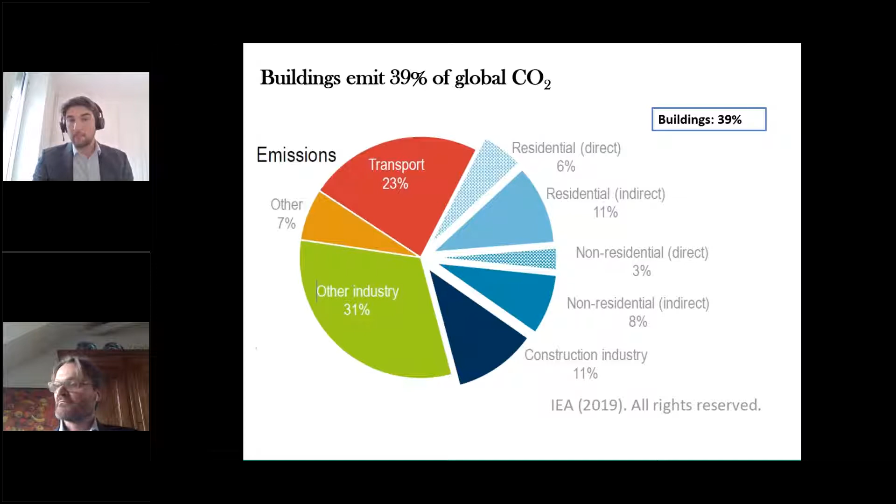Going a little bit further into new construction, you can see that globally, about half of the buildings that we're going to have by 2060 have not been built yet. This is equivalent to a whole New York City built again every month for the next 40 years. That firstly shows a challenge of a whole lot of new emissions we can expect to come in through construction and operation, but also it is an opportunity to build a green New York City every month.

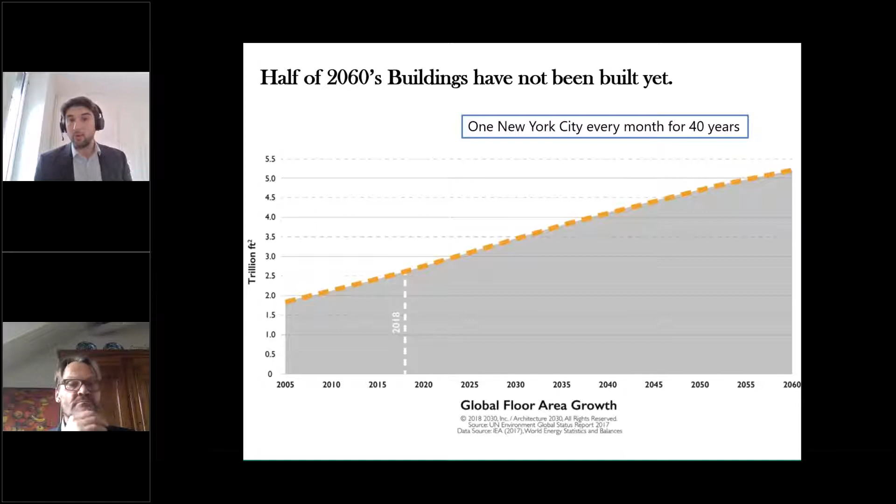And when we look at the data a little bit further, you can see that this opportunity is particularly big across Africa and Asia.

Whilst in Europe and North America, most of the buildings that we'll have by 2060 have already been built, and there the biggest challenge will be about greening our existing building stock. Across Africa and Asia, there will be a huge boom of construction over the next several decades.

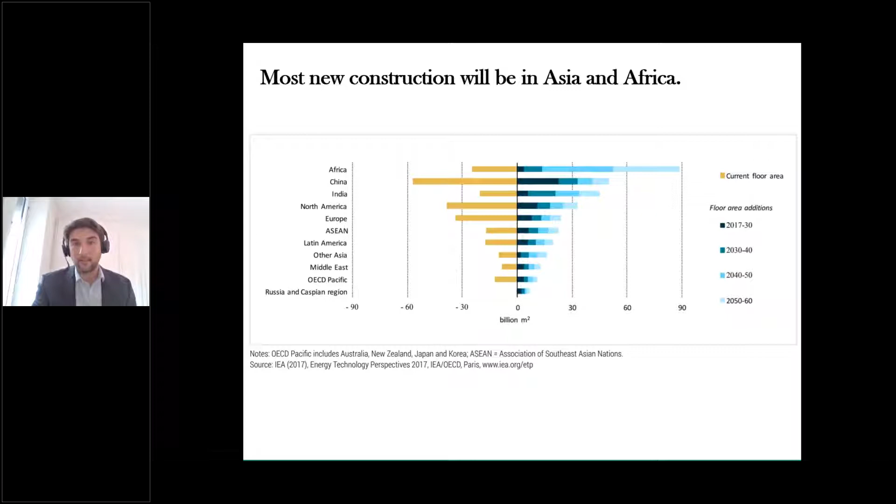And this is also where AKDN is very active. So we have a big opportunity to make these buildings green and to embed green performance and principles there from the outset. New construction provides a great opportunity for climate action, especially across AKDN geographies.

To achieve this, green design is key. We can retrofit green performance, and this is possible. However, when we do this from the outset of the building design, planning, and construction, it is more powerful. We achieve better green performance, and we do this a lot more economically. So we achieve more with less.

So how does AKDN approach this? Last year, AKDN introduced a set of green building guidelines covering all our new construction projects and all existing buildings. These guidelines are applied across all new projects. They cover a set of themes, which are materials, greenhouse gas emissions, energy use, water use, and importantly, adaptation.

Across our built environment work, we are ensuring that climate change mitigation and adaptation go hand in hand. So not only are our buildings green in the sense that they emit less and contribute less towards global climate change, but also we are striving to make them resilient and adaptable to the challenges that climate change is bringing, and they provide a comfortable environment even in the new climate.

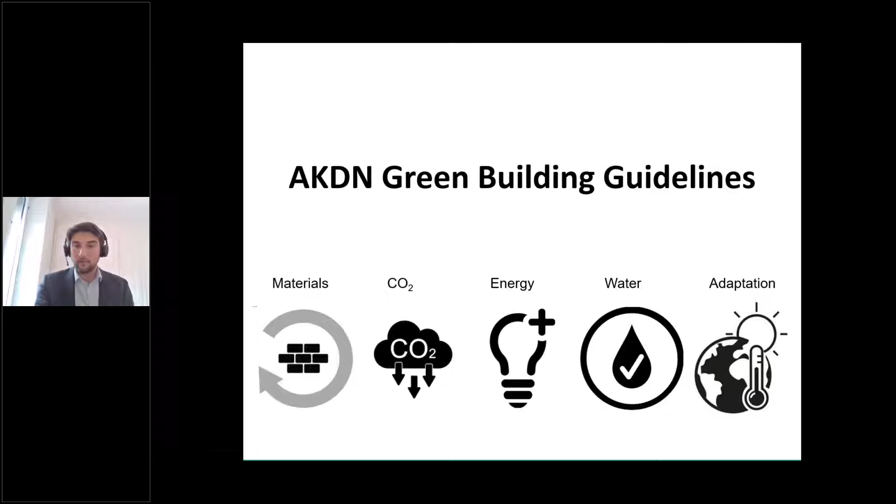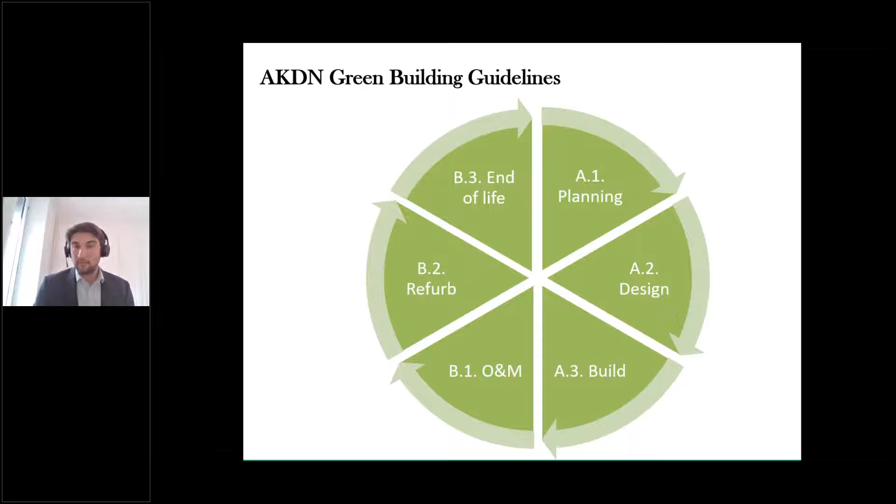The green guidelines take a life cycle approach, so they address all life cycle stages of a building, starting from planning, deciding that we want a new building, through to design, construction, all the way through operation and maintenance, and through to the end of life and decommissioning. Today, we will focus on new construction.

So the overall philosophy for new construction may be counterintuitive: when we're building, the greenest way to build is not to build. This certainly doesn't mean do nothing. Build nothing is all about going back to the principles of our objectives. What are we trying to achieve through construction?

Is it providing affordable healthcare to communities? Is it providing widespread education or safe habitat that enables communities to thrive? Whatever our objective is, we are now, as a standard part of the feasibility discussions of a project, going back to the original root objective of what we're trying to achieve and seeing, can we achieve this without building?

Can we use what we already have, repurpose an existing facility and refurbish it? So that we can achieve our objectives in a greener way? Can we leverage the use of technology to achieve our objectives?

All of these are not only powerful carbon reduction and green approaches, but also very much cost effective. So they directly relate to large cost savings. So they're very interesting, and we are starting to consider them seriously across all our new projects.

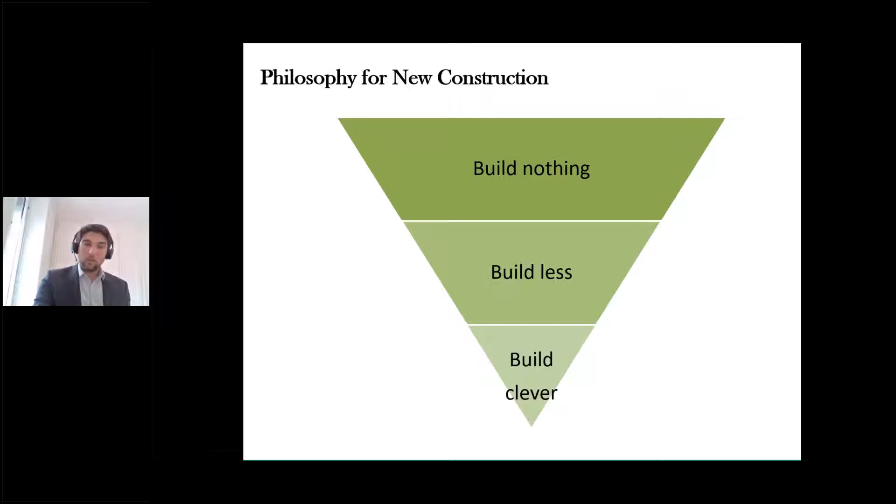So taking this on building clever, we'll start with what our buildings are made of, so materials. And this picture is one of our projects in northern Pakistan, and this is relatively representative of a large part of construction in the region, and it is with reinforced concrete.

So a lot of our construction currently is still with reinforced concrete or with steel structures, and considering the large volume of construction that we're expecting in our geographies, concrete is likely to play an important part of this journey. We are happy to see that we are already...

having low carbon alternatives to traditional concrete penetrate the market across, for example, East Africa, across Pakistan and India. And we're seeing some solutions offering up to 30% less CO2 for concrete compared to concrete using ordinary Portland cement, whether this is through cement replacement or through other adjustments of the formula of cement. So this is really important, and we're already exploring how to use this on our projects.

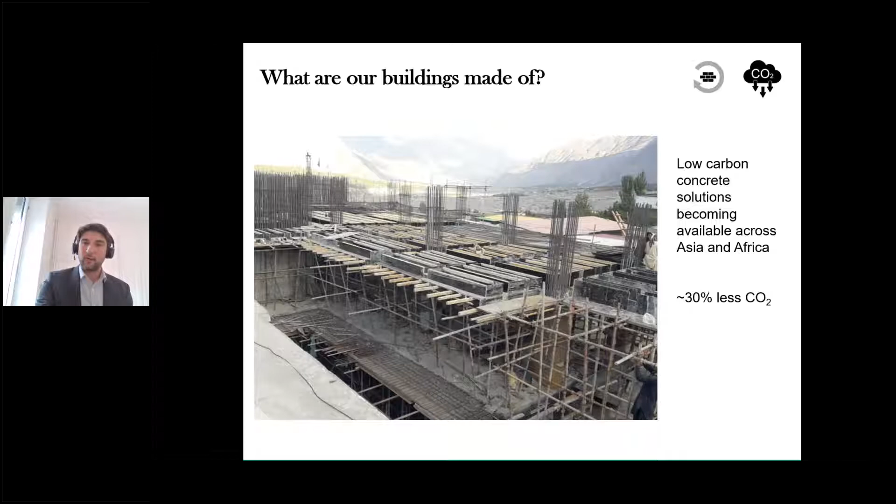We are currently leading, together with the Auroville Earth Institute, a training program for our teams in Syria, enabling people not only to design but also to manufacture these products. This is a really interesting product because it is more climate friendly, very low carbon, locally available, affordable, and it gives rise to economic activity locally.

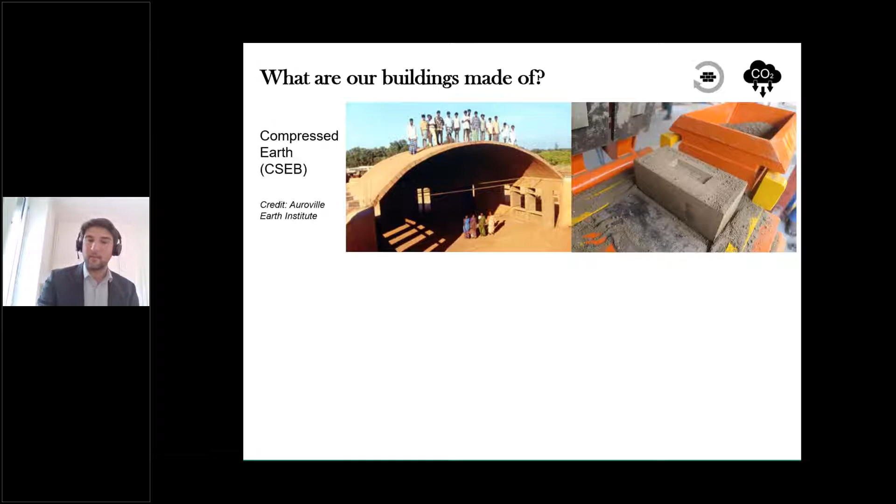So it helps people improve their lives, not only through building robust and resilient buildings, but also through economic activity. I'm just going to show you a couple of these examples. The next one is sustainable timber. We are more and more looking for opportunities to use sustainable timber in our construction. Of course, timber has been used in construction for thousands of years. We are looking to revive this, very importantly, in a sustainable way.

We are looking to introduce safeguards to make sure the timber is sourced sustainably and doesn't contribute to deforestation. This is actually a very powerful way of reducing carbon in buildings, and even buildings can become a sink for carbon, becoming net zero or even carbon negative in some cases. So we're working with partners from the Climate Smart Forest Economy program to explore how we can use this material and prepare the market in some of our geographies to do this more at scale. We're starting with solid timber, but hoping this will help the market evolve to use engineered timber products like glulam or even cross-laminated timber.

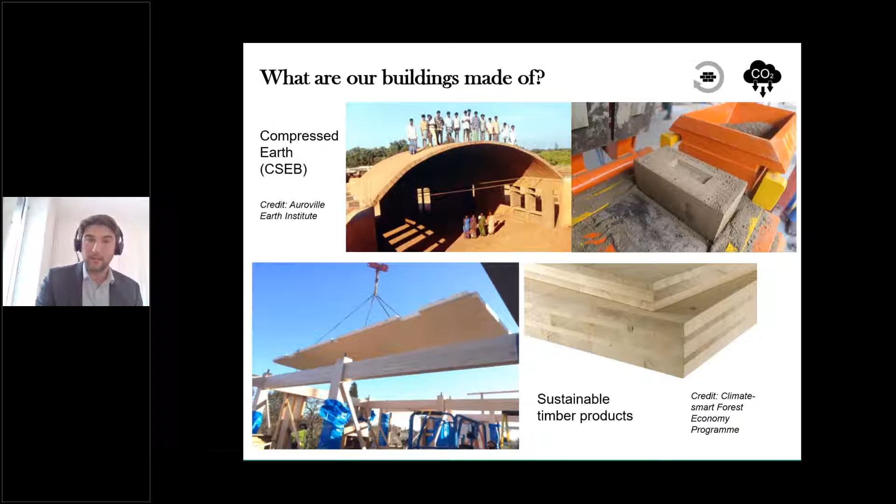So these are a couple of examples around greener materials. Let's move to energy use. When we talk about energy use in buildings, particularly for new construction, there are two aspects we consider as part of our green building guidelines. One is reducing the energy demand through passive design measures and efficient design.

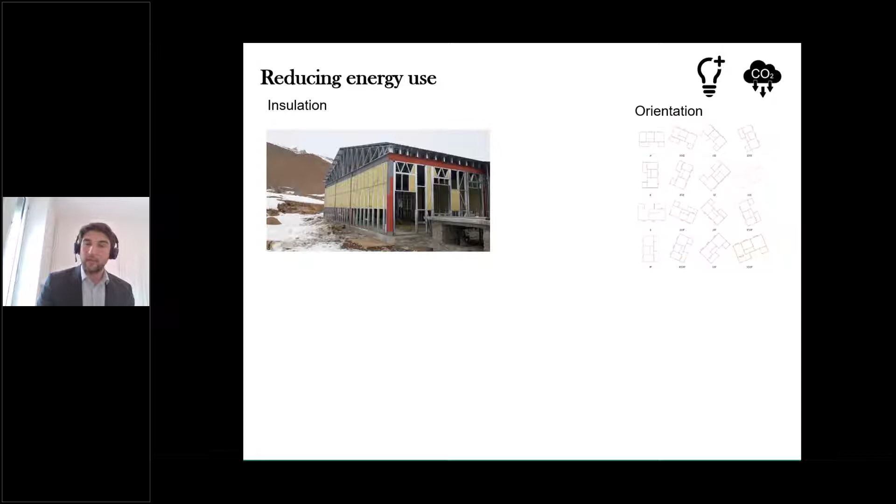This can include the use of insulation to retain heat within the building where we want to reduce losses. Orientation is a very powerful consideration, where we can orient the building towards the sun in cold geographies to maximize solar gains, or away from the sun in warm geographies to minimize this. Also the size and location of windows, as well as efficiency and the use of shading, are really powerful ways to reduce the energy demand of our buildings.

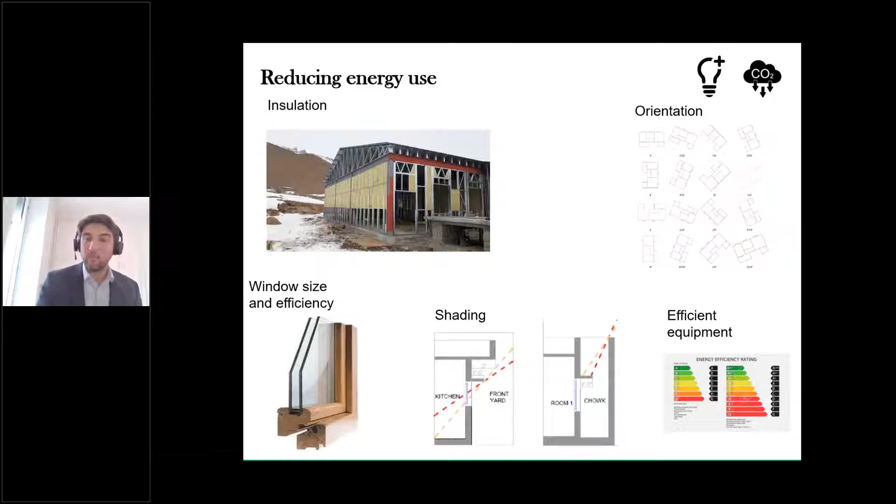Some of these we can also use as retrofit—for example, insulation and efficient equipment can be retrofitted. It is more costly to do that at a later stage, but still important solutions. However, something like the size of windows or orientation is a really important consideration early on in the design.

The second consideration around energy is about the source of energy—where does it come from? We've reduced the energy as much as we can, and now we need to source the remaining. The reality is, at the moment, a lot of our facilities at least partially rely on generators burning fossil fuels. This is partly because of considerations with grid reliability.

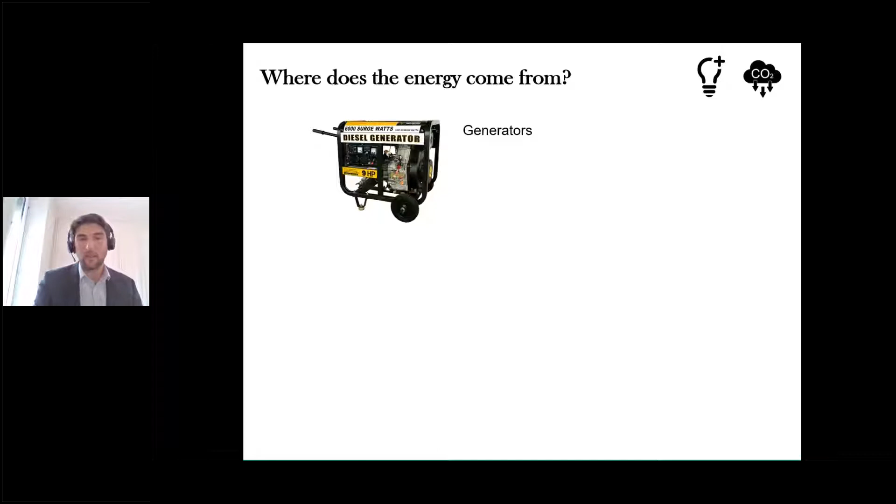For example, many of the rural locations we work in don't even have access to the grid, so they have to rely on solutions like this. Those locations which do have access often experience low grid reliability, so there's at least partial reliance on generators. At AKAH, we have already started our journey on phasing out generators. We are starting to introduce on-site renewables, as well as exploring off-site renewables, and creating a plan to phase out all of our generators over the next few years.

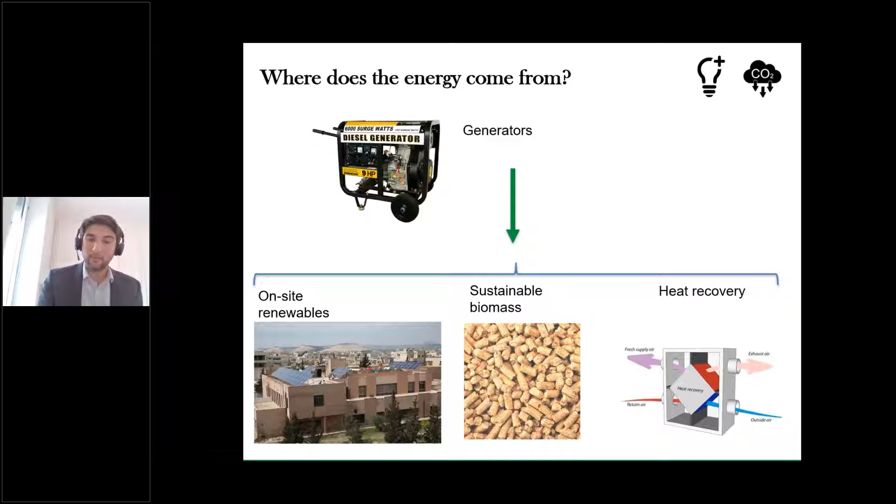We are exploring the use of sustainable biomass for heating water and spaces, as well as various heat recovery options, including heat pumps. All of these are part of our AKAH-level decarbonization efforts. So how do we measure all this?

AKDN has started using the EDGE green building framework. EDGE was developed by the IFC, the International Finance Corporation, as part of the World Bank Group. It is similar to other green building frameworks like LEED in North America or BREEAM in the UK, but it is different in that it's specifically tailored for developing economies—targeting Africa, Asia, and South America. As such, it is very applicable. It is simplified, and we're finding it quite useful as a design support tool.

AKDN has utilized this and introduced a minimum green standard for all new construction. This includes a 40% reduction of operational energy compared to a local baseline, as well as a 20% reduction of water use and 20% less embodied energy in the materials.

So this is the minimum standard for all AKDN construction, but some of the bigger and more substantial projects will have even stricter standards to ensure that buildings truly support AKDN in our journey to decarbonization and reaching net zero.

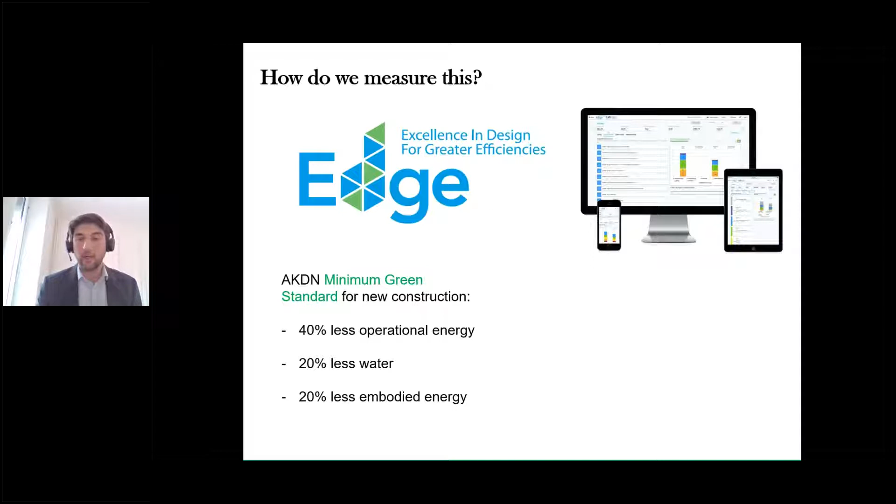I just want to close by reiterating a couple of points. Buildings are an important emitter. They emit almost 40% of global GHG emissions, and they rightly are a focus of a lot of global efforts on decarbonization. Construction specifically offers a great opportunity for climate action, especially in Asia and Africa, where AKDN is very active. And to leverage this in an economical and effective way, green design is key. We need to get in early and start incorporating green considerations from the very start of our planning and design for the new built environment.

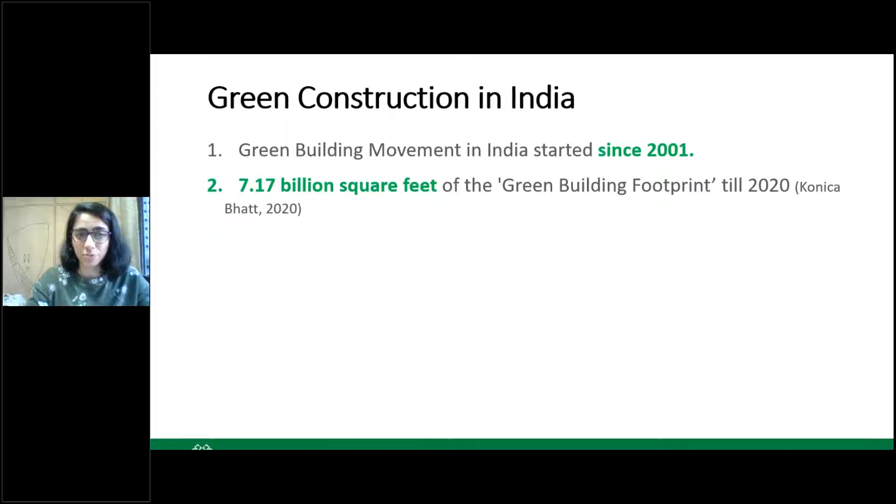As we started off the green building movement in the year 2001, and now we have over 7 billion square feet of registered green building footprint in India. We also have a mandatory code for all the commercial buildings and a voluntary code which is specific to energy conservation. But we also have a huge gap in housing, over 60 million houses to be built in urban and rural areas. And this is going to contribute to a lot of emissions.

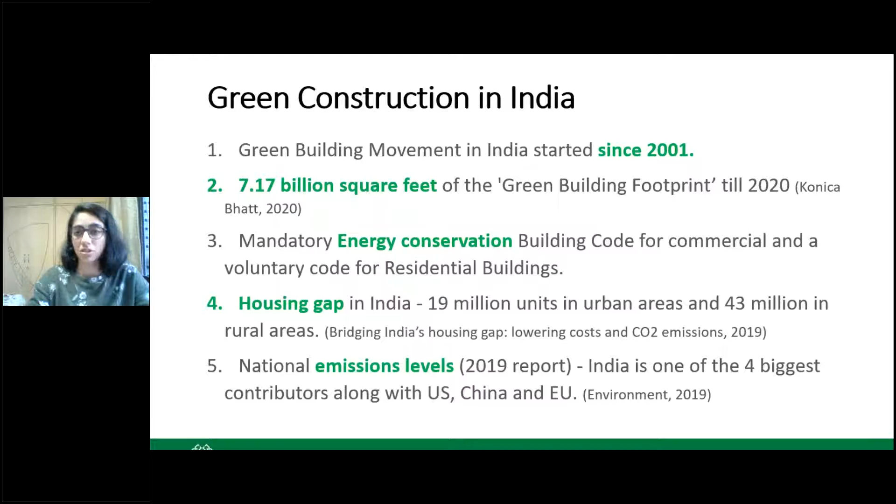And as such, India is already one of the 4 largest contributors. Although the per capita, that means per person, the kind of emissions that we do in India is lower, but considering the kind of population that we have within the country, we do contribute to the global emissions quite significantly.

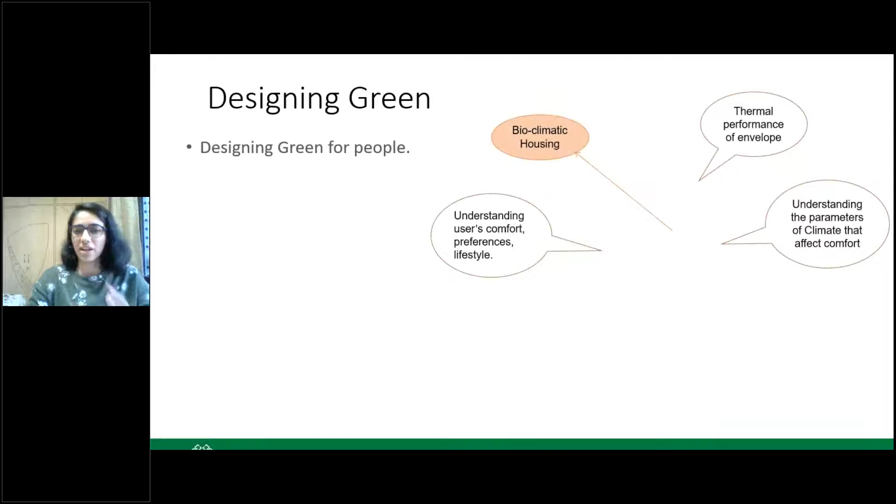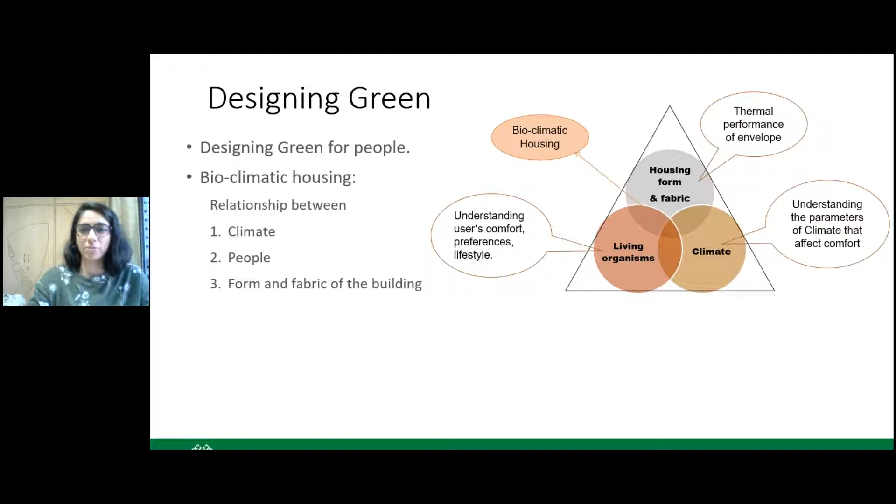So let's move on and see how we're designing green to be able to build green. So everything starts with a vision, especially when it's architecture, and people are the focus for whom we design buildings. So we've used this concept of bioclimatic housing, which I'd like to just explain very quickly. It defines the relationship between how you design with keeping the climate, as architecture is a response to climate as well as culture. So bioclimatic housing looks at the preferences, the lifestyle, the user's comfort, and the climate in context, and then designs the building form and fabric to be able to give a comfortable building.

So using this design principle, we've done a number of over 150 rural houses which have natural ventilation, daylighting, and significantly reduce the heat transfer.

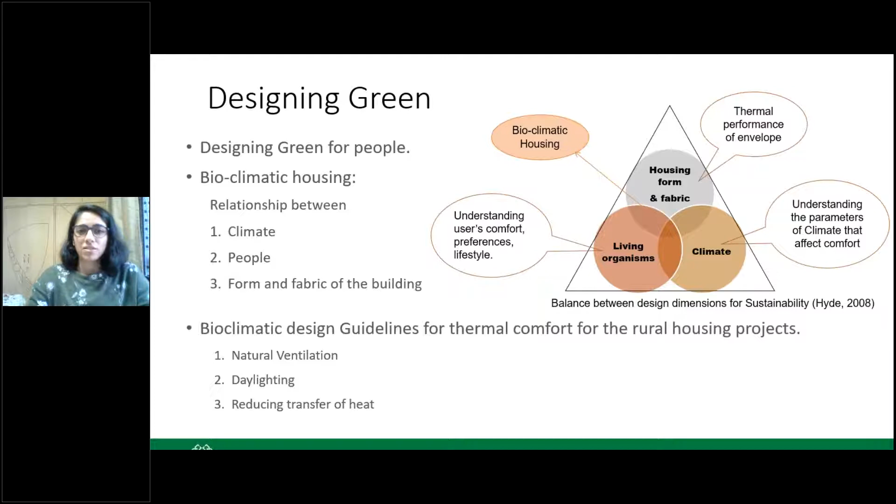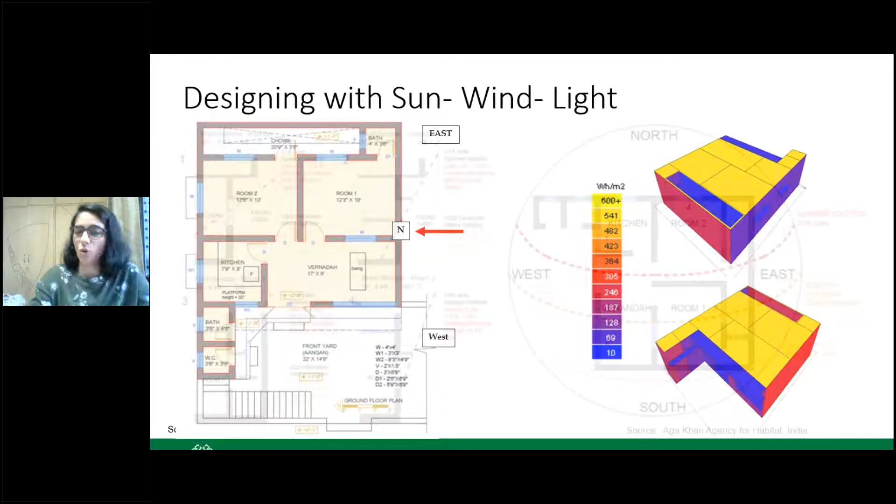So basically in green design, you make sure that you use the 3 important elements of nature, the sun, wind, and light, as G.Z. Brown has indicated in his architectural design principles. So we look at how the heat of the sun interacts with the building, which is the area that is exposed significantly, such that you treat that rather than treating the entire building. And then you also look at the movement of the sun annually over the building, such that you can design simply a simple element like a sunshade, allowing the winter sun to come in, so that you can have passive heating without needing to spend on heating when it's cold.

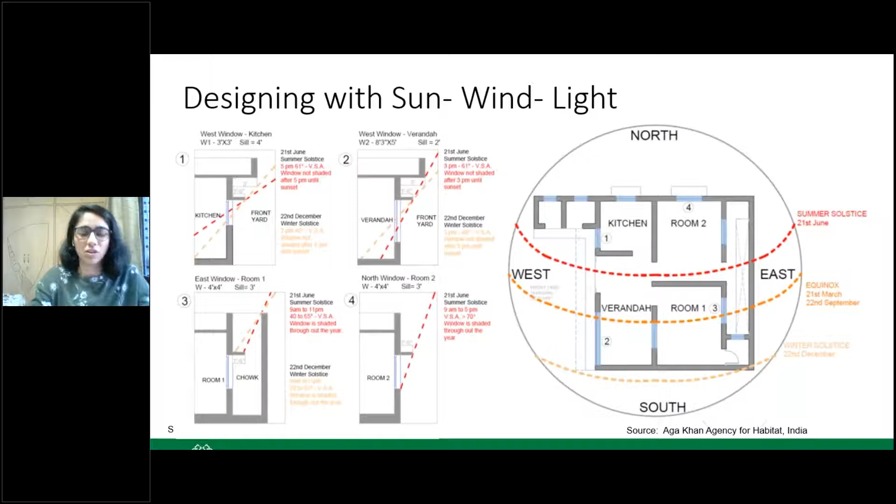And the sunshade during summer kind of blocks the sun and avoids overheating the building. So these are some passive design principles, as we call them in architecture, where basically we do not spend energy, but we still ensure that the building uses less energy during its operational phase, like when people are occupying it during whatever the life of the building is.

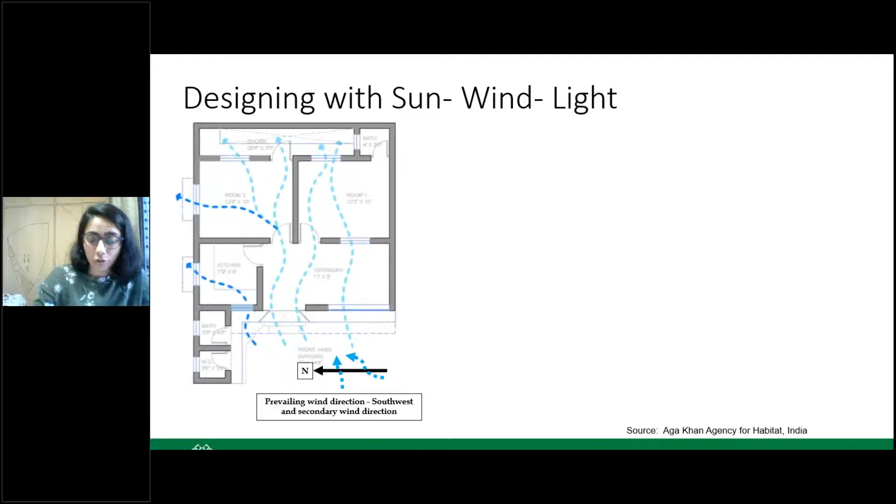Coming to how you allow the wind to come in by orienting, especially when it's a low-rise building, more than the sun, it's the wind that you want to take in. If it's a warm and humid kind of weather, you can naturally ventilate the house by providing the required number of openings, as well as the size of the openings, as well as the location, such that you can build like a draft of air, cool air coming in, and landscape your front yard.

So these are small little things in design that can ensure that your building is using less energy, but providing the required comfort to the occupants. And openings play an important role in getting the daylight, so that during the day you really don't need electricity. And now that we're spending so much time at home, we realize the importance of having a well lit home, where it's so comfortable to sit, work, study in the daylight.

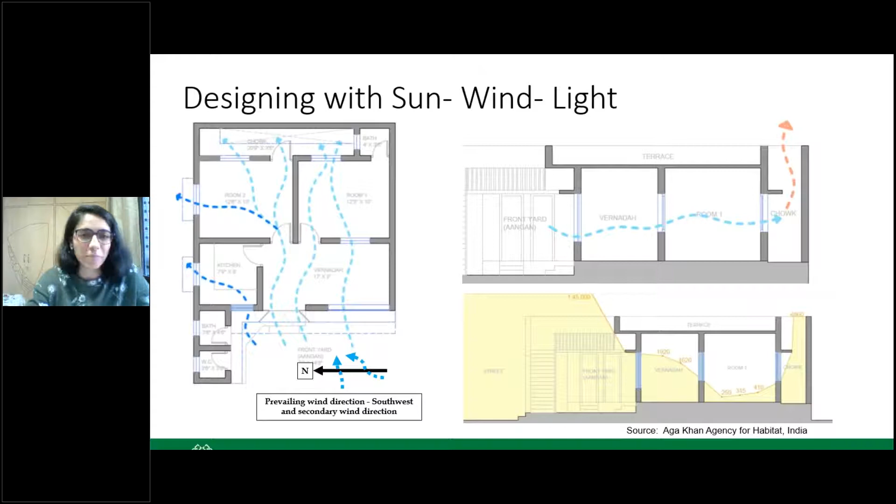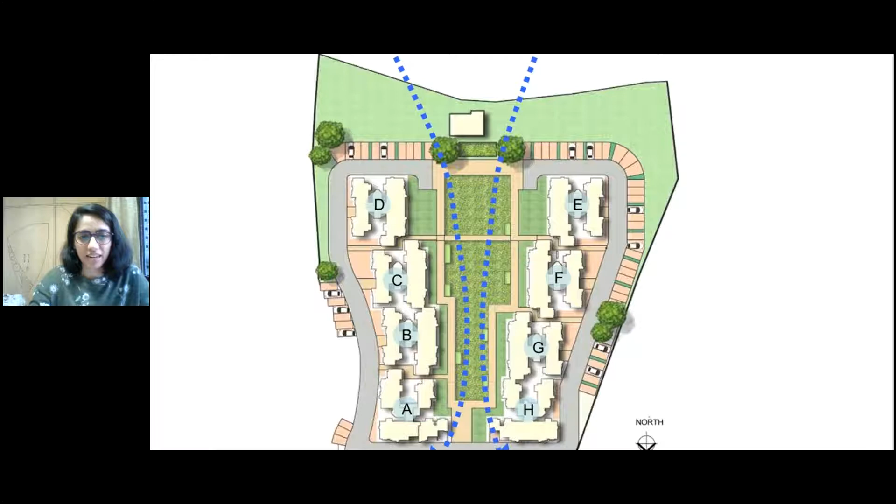So these are some pictures of one of our projects, rural housing. This project is a group housing where the whole master planning is done to ensure that you're taking advantage of the prevailing wind direction and the daylight and the cross ventilation. So ensuring that you design your units in a way that...

When you do a multi-story building, it generally tends to get difficult to ensure daylight and ventilation to each unit. But that is critical, because the more effort you give in the design stage, the better the building is for the users, the more comfortable and the more resource efficient in the long run.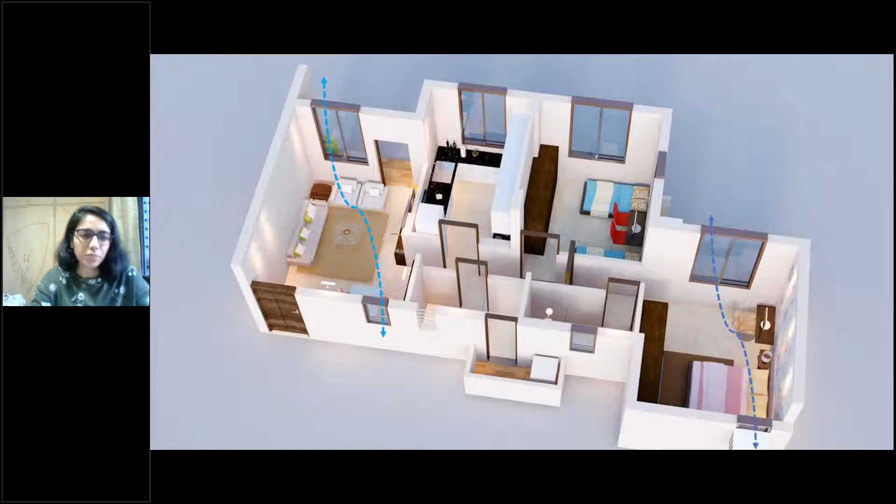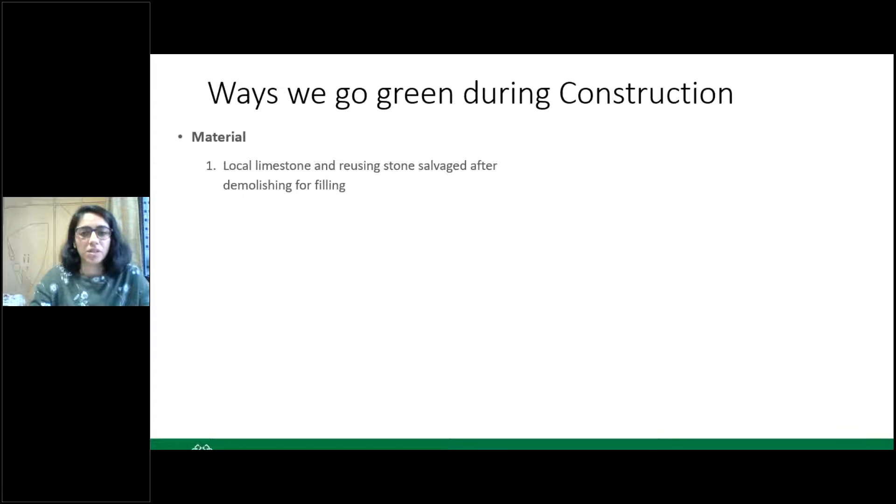So moving on to some of the initiatives during construction, an important thing taken care of is using local material, so that you don't import from long distances. And again, if you can salvage during a reconstruction project and reuse some of that debris for filling up, that's one way you can reduce the use of new or virgin materials.

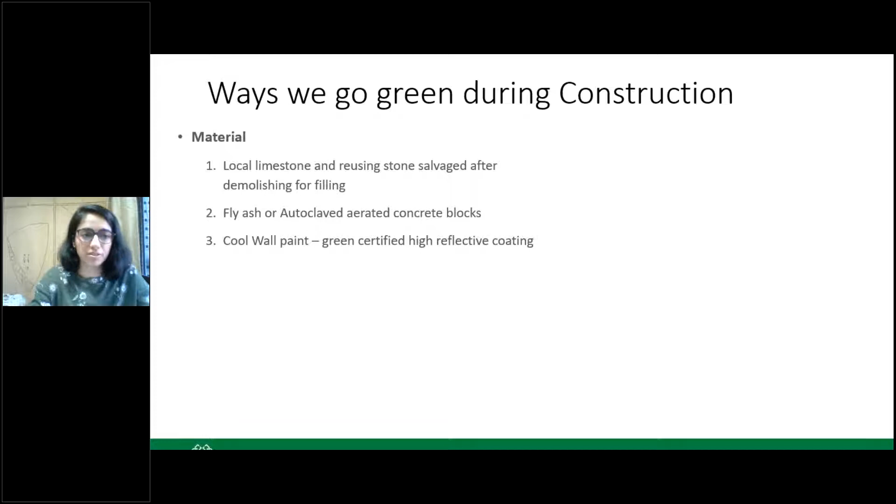Using fly ash and autoclaved aerated concrete blocks, generally known as AAC, will reduce the weight of the building. So the leaner the building, the lighter the building, basically you will spend less steel and concrete for the structure of the building, and that's where you will save even on the cost as well as on the embodied energy.

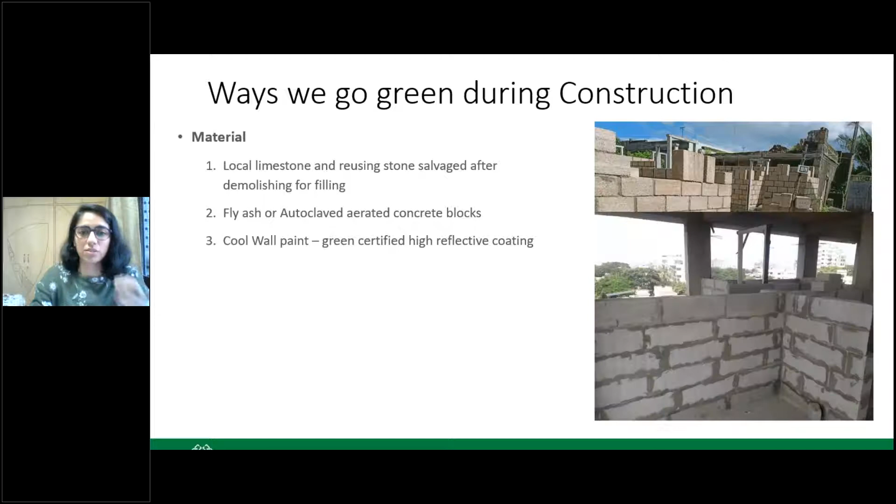And using high reflective wall paints and roof paints to again ensure that your building doesn't take the heat, because I'm talking about India, where majority regions require passive cooling. So that's where you design the skin or the fabric of the building in a way that you end up using less energy during the life cycle of the building.

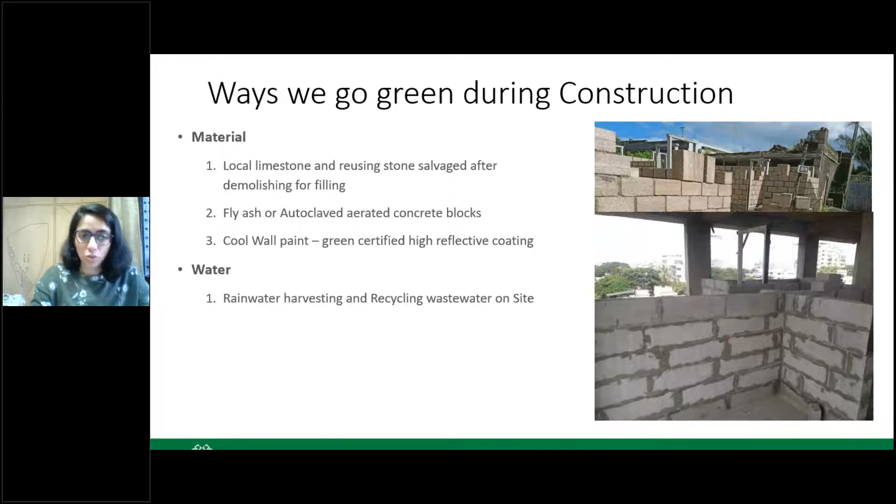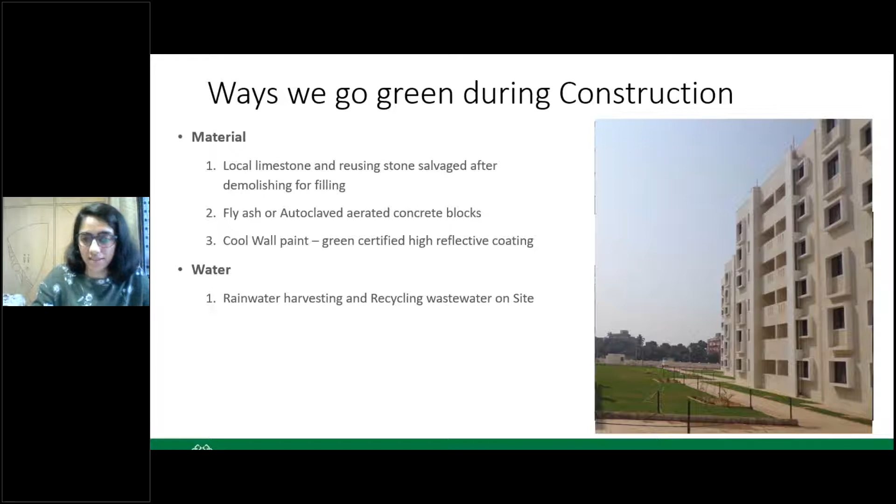Coming to water, yes, rainwater harvesting and recycling wastewater on site are two important features that are easy to incorporate at the design stage, especially if you do have a landscape area. For example, in this project, we've used a zero energy plant-based filtration system that gives you over 68,000 liters of treated water.

And that's where in areas where you have an issue for water security, going green during construction by taking care of the wastewater that will get generated, you can ensure water security in the long run.

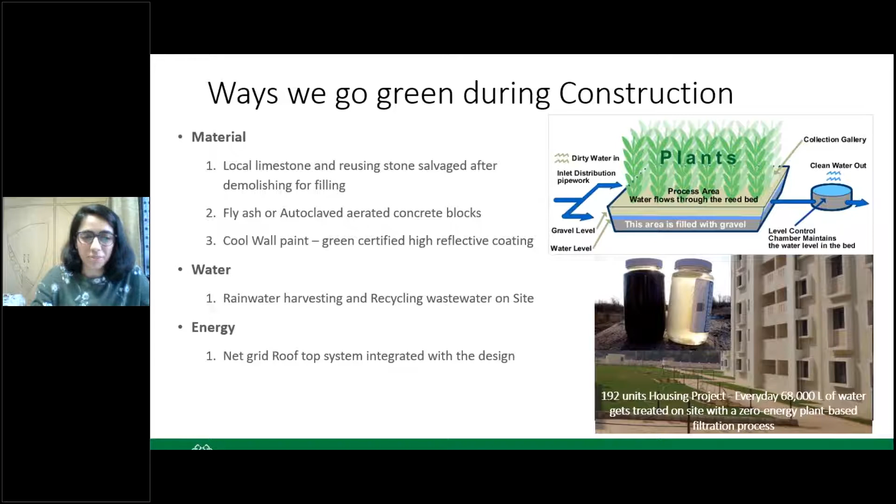We've already looked at how net grid rooftop solar systems can be integrated, and this is one of the design projects where we've ensured that it is not an add-on, but it is along with the design of the building, so that we can have the solar panels on the roof and have a cool roof and a cool wall, or a high reflective kind of envelope, that will ensure the building doesn't get heated, so that you don't have to spend too much on cooling it.

And again, you have your rooftop solar that will ensure you are exporting to the grid while you are using the energy from the grid.

And yes, we have an emission management program since 2017, where we are looking at what kind of emissions take place due to the construction, and we try and reduce it, especially in all our community programs, by using local labor and material.

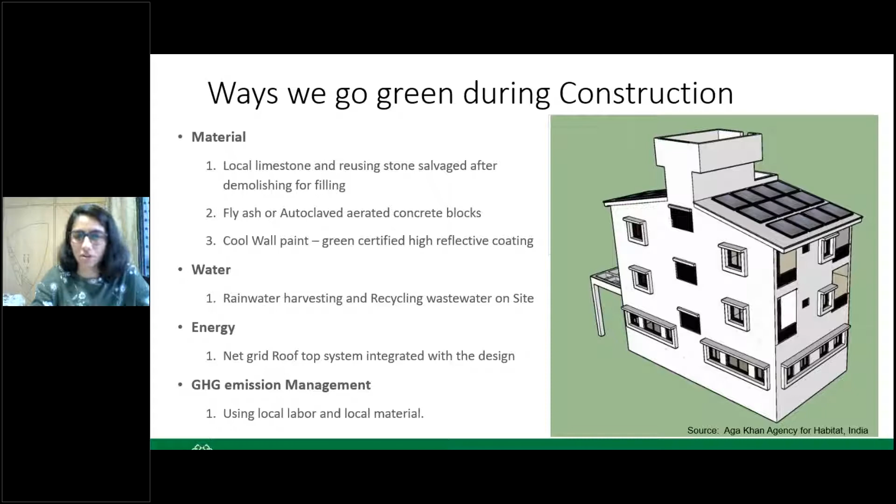Moving on to green retrofitting. I'm not sure how many of us have really heard this term.

It's relatively new, but I'm sure in many different contexts we've come across it in one way or the other. It basically means you have a good set of existing buildings that have the potential to go green, to become more resource efficient.

That means you can use less material, less water, and less energy even after the building gets constructed. So when you're doing repairs, you can use green certified products, and that's some of the projects we've explored, using low volatile organic compound paints and waterproofing materials that are certified green and give long life to the building, such that you elongate the life of the building and reduce the need to reconstruct in the near future. This is one of the cool roof applications we've done on our project.

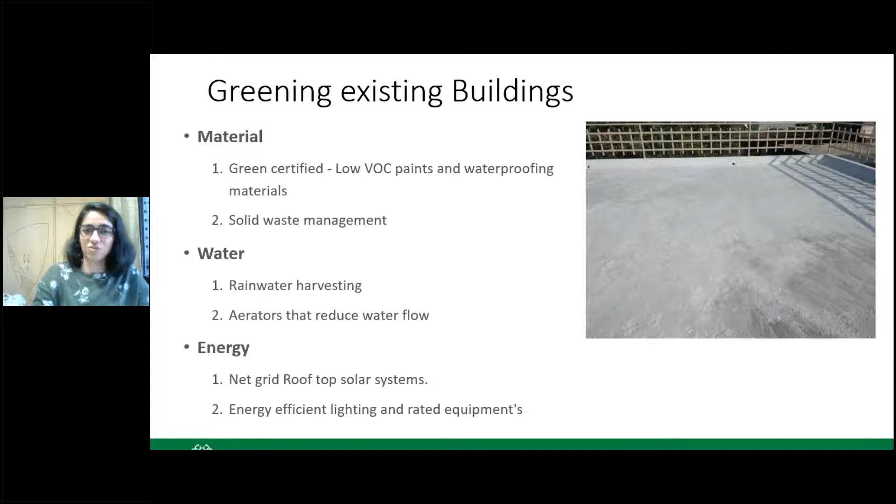The second is solid waste management. I think this is more of an urban, peri-urban issue, but slowly we are finding the landfills are getting bigger and bigger. So having a decentralized waste segregation and composting system, like this example of a zero energy tumbler system, you can create manure, your compost, and use it in the landscape right on site. More than 60% of our waste is biodegradable, and it can be easily managed on site.

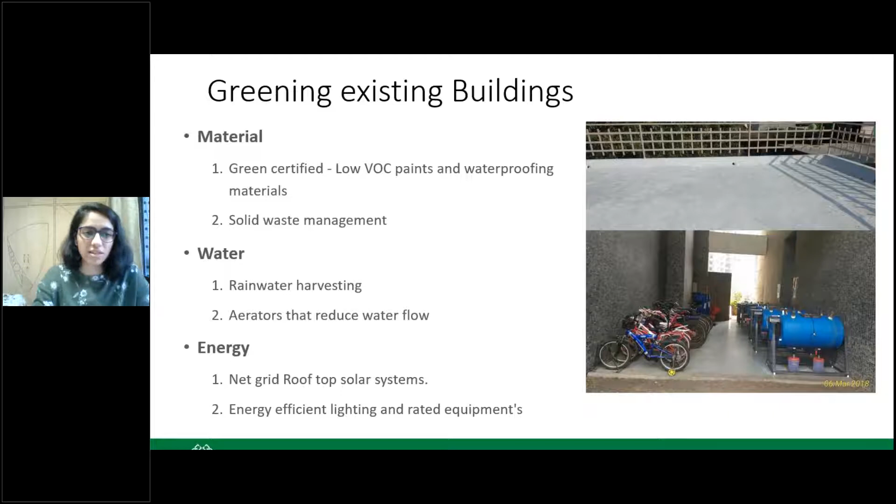Coming to rainwater harvesting, that's not just a way to ensure water security, but also a flood mitigation measure in cities like Mumbai, which have always seen these flash floods. When you have a lot of rain and a harvesting system, that also ensures you reduce the runoff on the streets or the drainage system, which is already overloaded. So this complements water security as well as mitigation of floods.

Using aerators is very simple; you can fix them even in existing buildings, and this is what we've been doing through our programs by creating awareness amongst the community that by simply having these fixtures, you can considerably reduce water flow, especially in areas that are water stressed during certain months of the year, like summer.

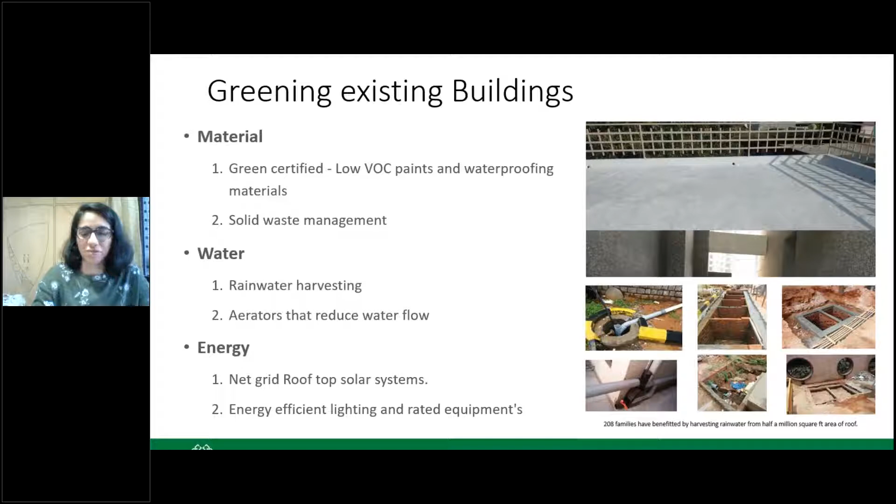And with energy, again, installing a rooftop system is still easier in an existing building if the structure permits. We've had many examples of individual houses and now community housing coming to us to understand how technically feasible it is to install solar rooftops, such that they can bring down the energy use of common areas in the building, and promote more energy efficient lighting and rated equipment.

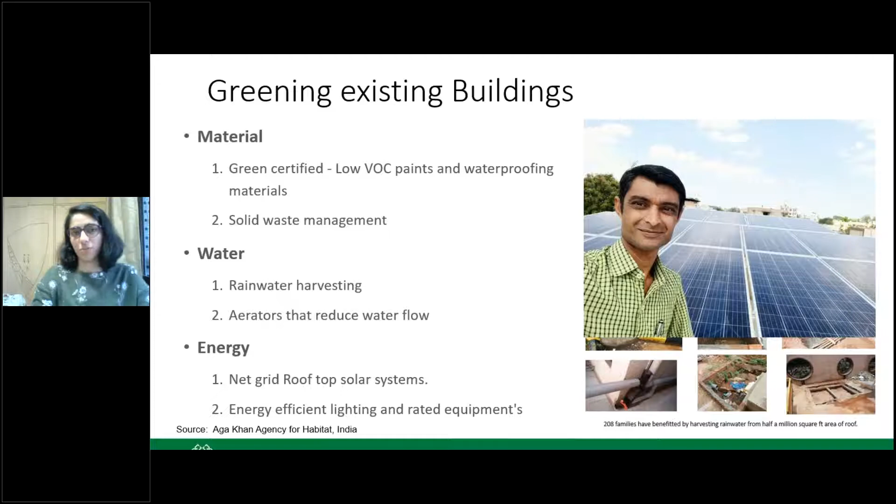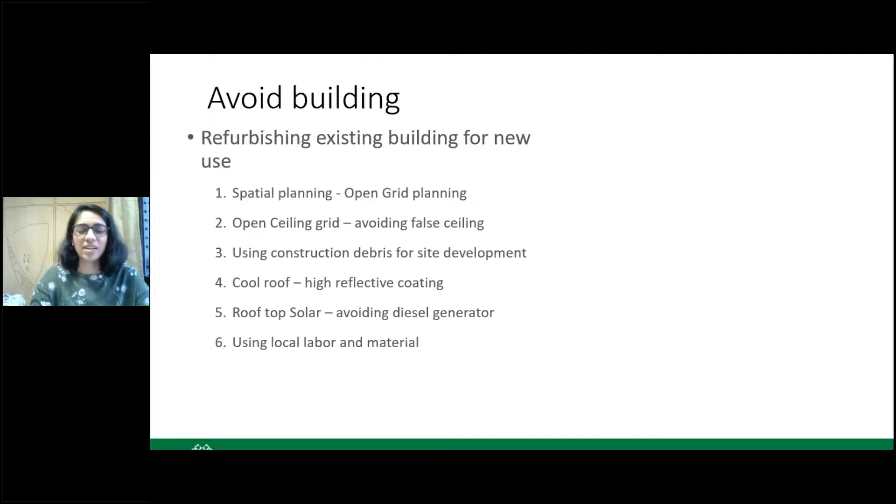So this is greening existing buildings, but there's one more important, interesting way to do green retrofitting, which is 'avoid building.' That doesn't mean having nothing, but refurbishing an existing building for a new use. It's also known as adaptive reuse, where you take an existing building — and I'll give you an example.

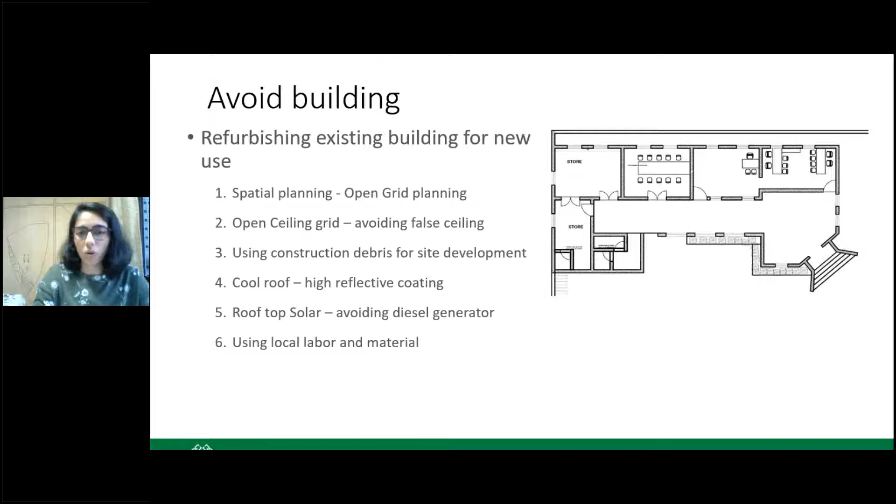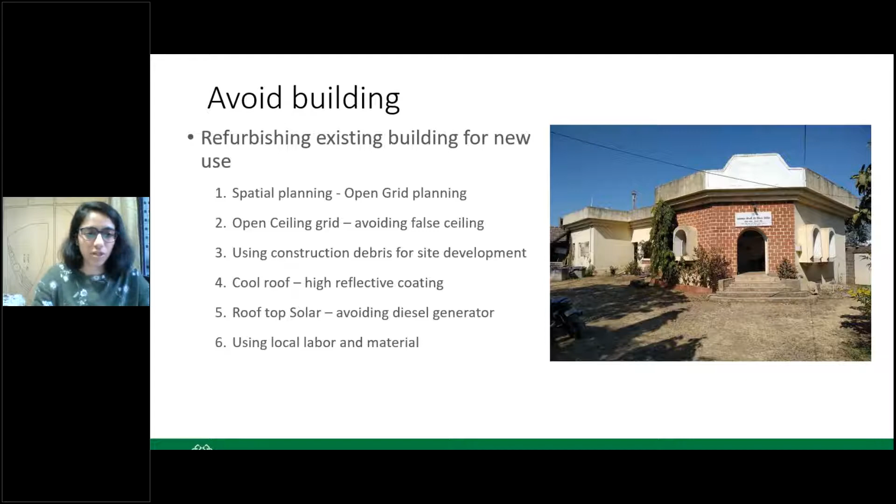We had an office space, and we decided, instead of reconstructing it, since the building still had life, why not do a spatial planning such that we could reuse it as a training center. We've included all these design features into it. This is how it looked before construction — it's a 40-year-old building which we had to redesign.

So looking at flexible spaces which are multi-purpose, with an open grid kind of ceiling — that's when you don't use a false ceiling. That saves a considerable amount of cost as well as embodied energy, because you can have a nice neat grid for your conduits and electrical fixtures which, if designed well, you don't really need to hide. And this is finally how it looks when we say 'avoid building.'

So we've retained the building, but ensured that it fulfills the need that we have. That's it. Over to you, Ono.

Thank you, Sana. Thank you for bringing that to life. I especially liked showing how you can repurpose a building and build something useful, and that way retain some value, and use much less of the resources.

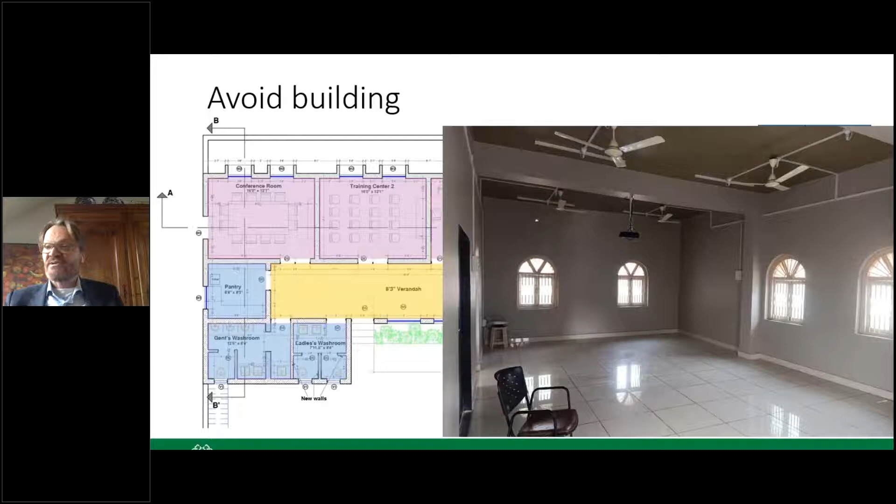Thank you very much. It's now my real pleasure to introduce Saif Ul Haque, who is the principal of the Dhaka-based architectural practice, Saif Ul Haque Sthapati — I guess he's the boss there. He's involved in the practice, research, and education of architecture. He's received many awards at home and abroad, and for us particularly relevant, he is one of the winners of the Aga Khan Award for Architecture in the 2019 cycle for the Arcadia Education Project. We're very happy to have Saif, and he will speak about what he learned from that project, for which he famously won the Aga Khan Award for Architecture. Saif Saab, over to you.

Hi, can you hear me now? I mean, we hear you and we see your slides.

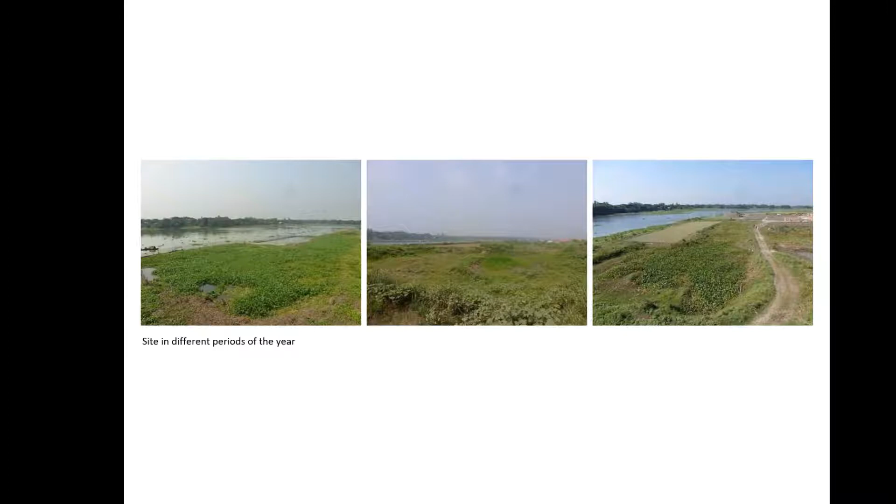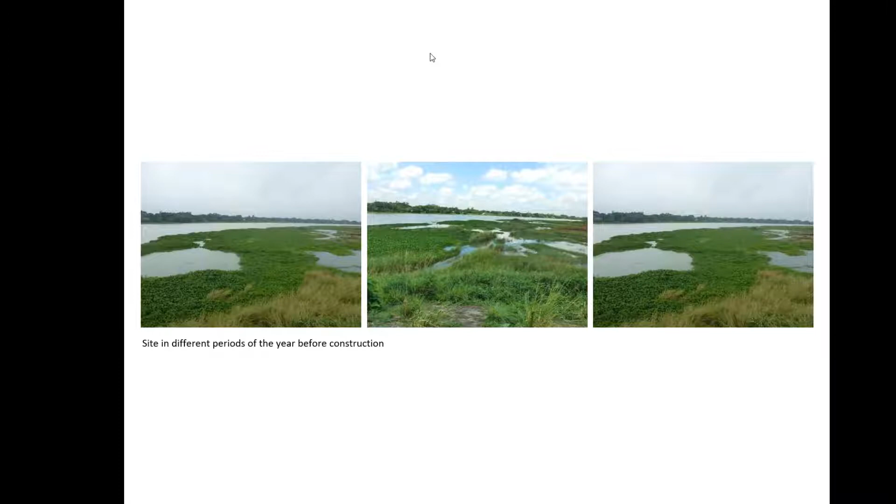And Bangladesh - in the next slide I will show you the floodplain map of Bangladesh. This is the monsoon condition, so it's all underwater. This is how Bangladesh's topography is like. The gray areas are the floodplains, which means that every monsoon, these places are underwater, or flooded to different degrees. And how can one build in this kind of condition?

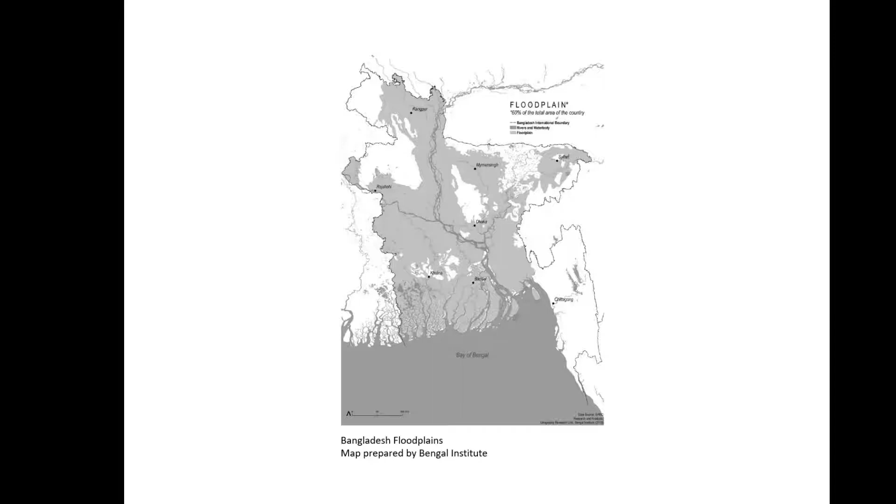So what has been happening lately is that with the use of technology, people have been filling up this kind of landscape condition with sand and making it level, which was kind of an environmental problem. These were very precious ecologically, but wholesale filling up was altering that characteristic. This is how technology was helping to fill up this valuable wetland condition. And we needed to devise ways of how to inhabit this particular floodplain condition.

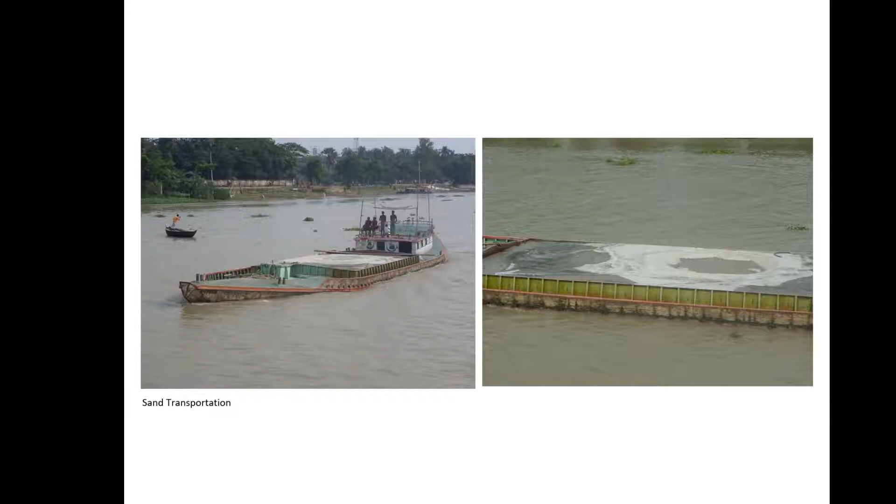And for this particular school, what could be an appropriate solution? Once we fill up, it transforms into a dense urban condition because land is quite scarce, and we are yet to devise ways of creating a condition of living where we have the water, where we have the land, and we also have the buildings or the infrastructure. So we follow this kind of technique to cover it.

So to me, the option was what to do. I initially thought of the traditional option of filling up and making the school building over there, but I was not exactly sure because the site was too narrow. If I was filling it up, I required a lot of retaining system to keep that piece of land raised above the flood levels.

The other option was to build it on stilts. When the water comes, the building could be free of the flood if it was high enough from the flood level. And the third option was to try out something new, an amphibious structure.

So when I shared these options with my client, she was very enthusiastic about the amphibious option. But I have to tell you that this was a kind of an untried thing over here. We do have floating structures, a lot of boats and other river crafts, pontoons, rafts, but somehow an amphibious structure for inhabitation was not much of a use in Bangladesh.

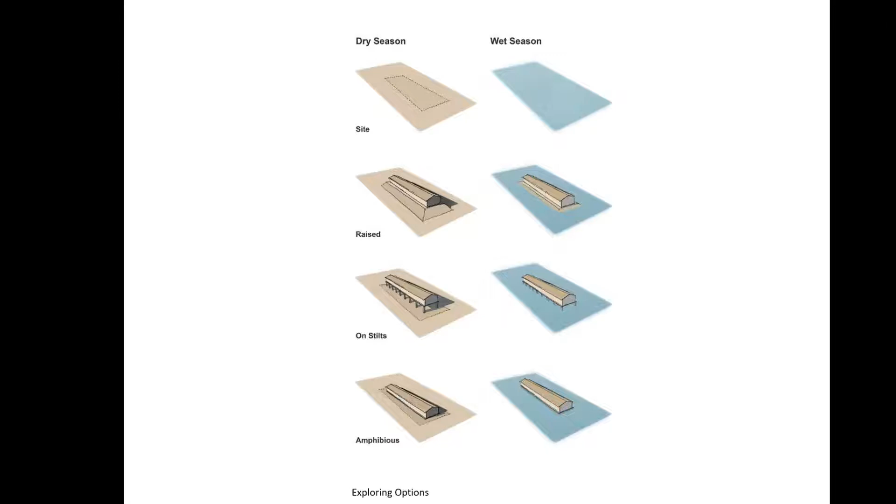So initially the conceptualization was trying to mediate between a very sophisticated technological solution and a kind of crafted traditional solution. So we tried to develop a design where we could use the idea of a raft with a lightweight pavilion that will float when the water is here and rest on the ground when the water is not there, using very lightweight material. We thought the most lightweight material we could use was bamboo, which was very easily available in the site and surroundings.

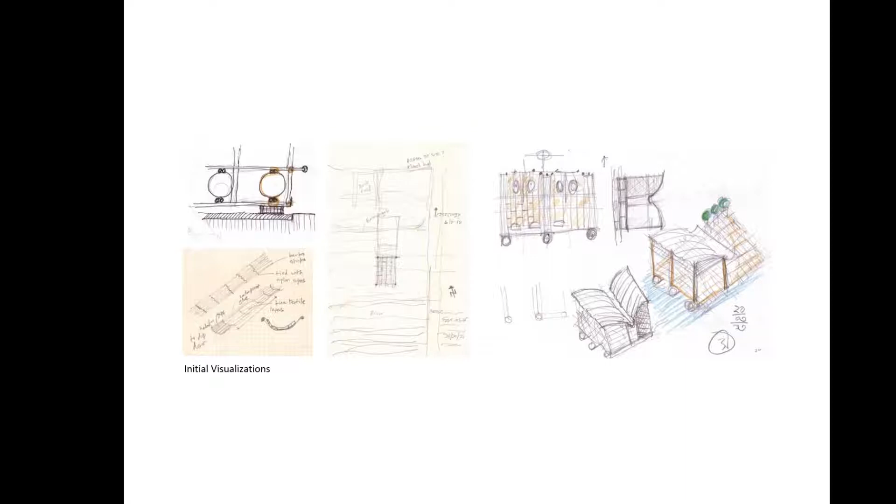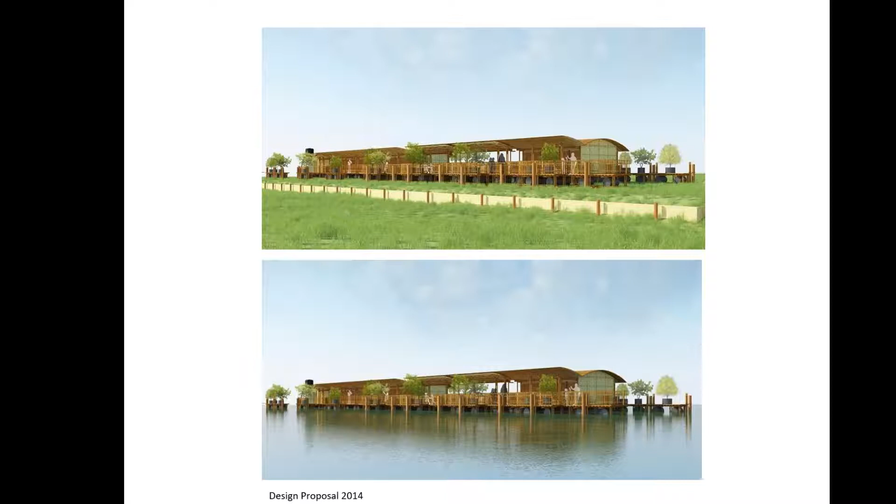So we presented an idea. This was the visualization that we presented to the client of the school, and she wanted to have the entire school built at one go. She had a very modest requirement: 3 classrooms, 1 office, and other support things. So we offered her this vision that you could have a place where it will be on ground during the dry condition, and when the water comes, it floats.

And this is the plan that we worked out. The site was a rectangular site. An obvious solution was a rectangular structure. But what we did, we made each of these classrooms and other functions as separate modules in order to make it more flexible for the water condition, instead of having a long fixed structure. We had separate modules connected to each other, with guideposts that would help it float and then settle again on ground. We needed to create a level condition so that when they're resting on ground, they're on a flat ground.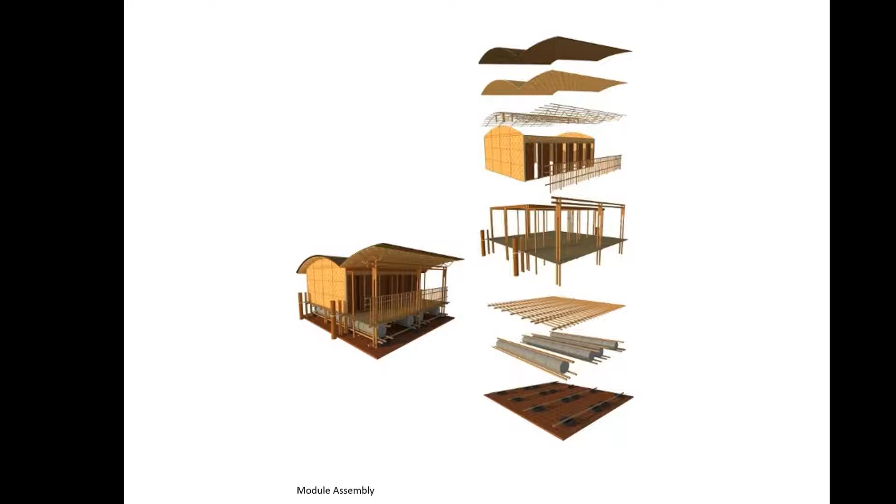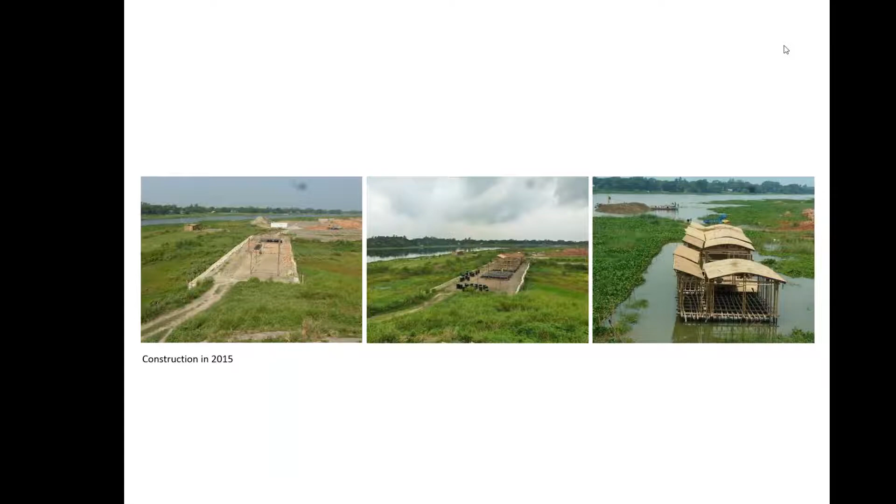And then the construction began. The construction began in December 2014, and it continued throughout 2015. The construction was carried out even during the monsoon of 2015, so we had to rush with the substructure work before the monsoon came, and the work continued during the monsoon.

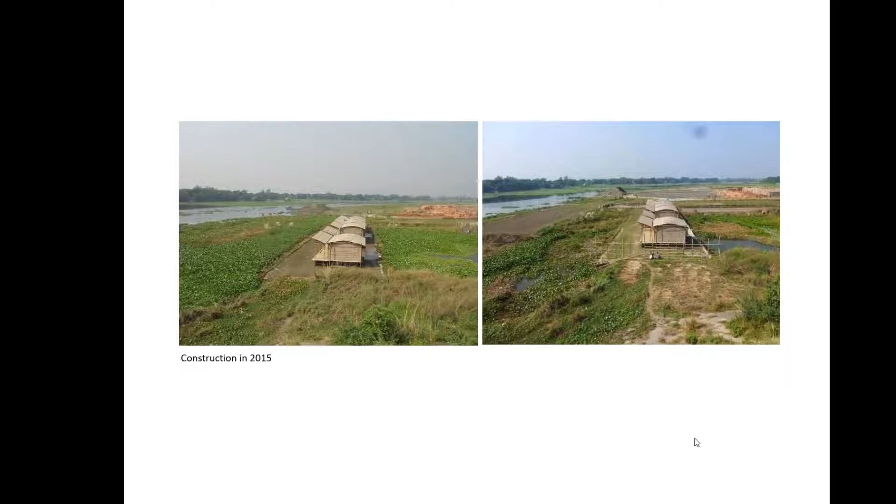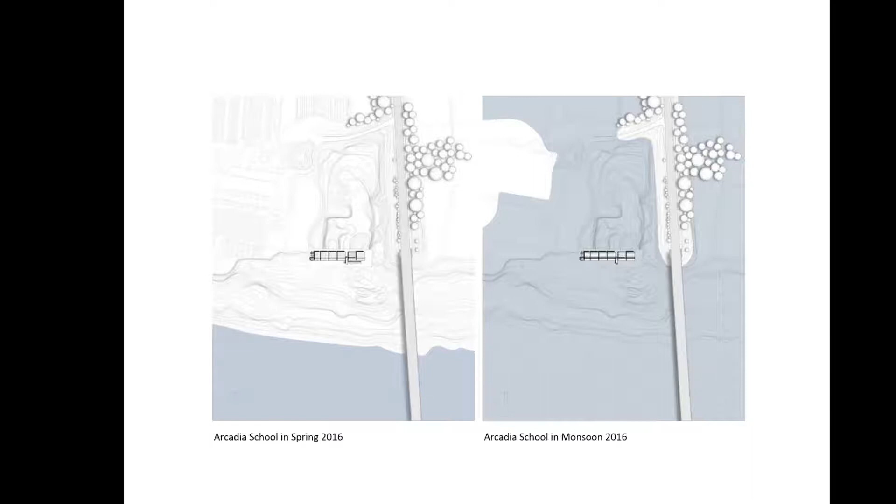And then the water receded, it became dry again, so we continued with the work. This is how we recorded the flooding of the year 2016, how the water gradually came to the site and then it was totally submerged, but the school kept on floating. And these are the two situations: the dry condition when the river recedes into its channel, and then in the monsoon, it is all flooded.

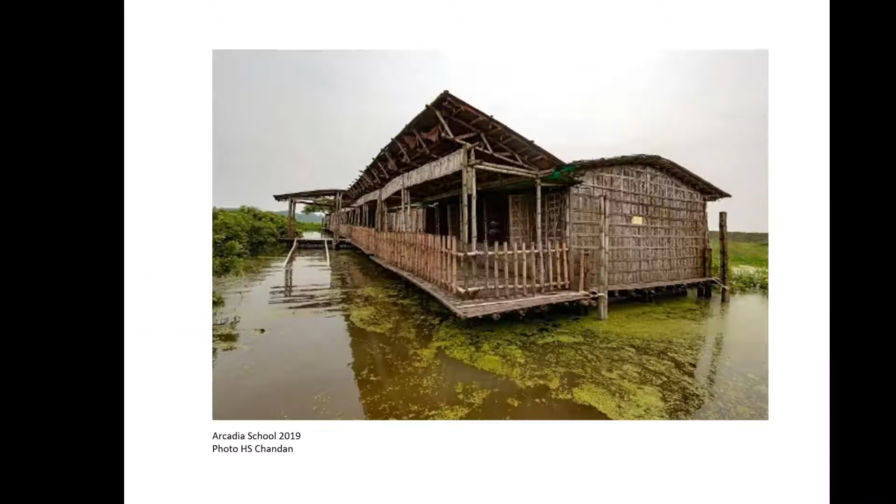As mentioned before, it was something we were trying out for the first time. It was an experimental project, and we didn't visualize a lot of issues that would happen in a dynamic condition like this. We had to carry out some repair and renovations as the years went by. But sadly, last year we encountered a very serious flood, during this COVID pandemic period.

So we were not being able to carry out much maintenance in 2020. So this year, the dry season is here, and somehow we have to make some more repairs and make it back in its original state. And we also plan to make it a bit more robust while we do it.

The lessons we learned from that are particular for this kind of condition. But how do we take it to other situations? How do we scale it up?

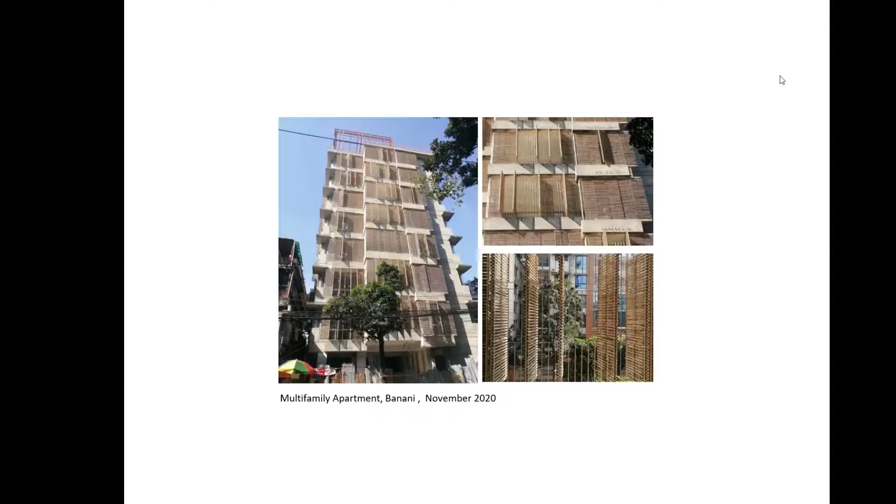Well, that was really great, and I saw Saif the images of the school a long time ago. It was fascinating, maybe not that long ago, but it's a fantastic example of truly path-breaking architecture. Thank you for sharing that experience.

We have a bunch of questions that I'd like to get started with, and I'd like to start with the question from Khuzaima Al Hussein. Yes, from Khuzaima Al Hussein, who refers to a famous architect from Egypt.

Sorry, my screen is giving me a little issue, it keeps jumping around. Who is Mr. Hassan Fathy? And he gave the idea that if you use local materials in a building, it would naturally be safe from weather effects, because there'd be a link between the location and the materials that are available there. What do you think about that, Risto?

And while you're speaking, Maria Kang would like to know if you're looking at rammed or compressed earth or straw-bale earth in the example that you mentioned from Syria. Could you take these questions to start off with, Risto, please?